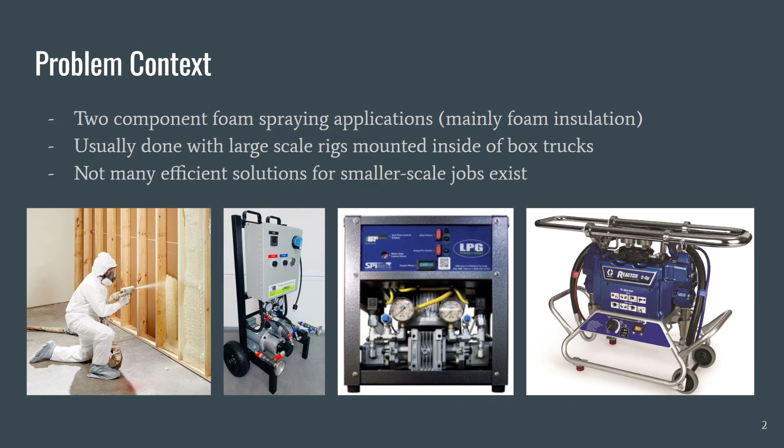So the scope of this project is to build a low pressure foam dispensing system that moves two material components from 5-gallon pails into the Nox hose assembly. There have been some prototypes in the past. We were tasked with improving upon these prototypes for ease of assembly, ease of maintenance, ease of use, and of course, cost and portability as well. And the other part of the scope is that it must be compatible with the Nox hose and gun that's already made.

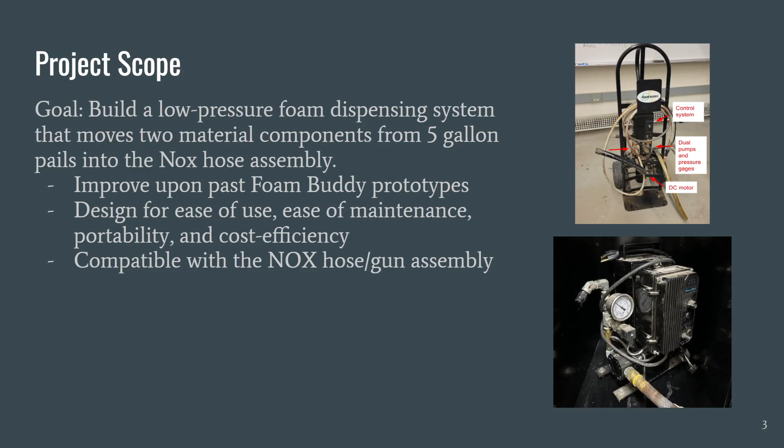Some of the key specifications are that the machine must have an adjustable output ratio, because most of the time we're looking for a 1-to-1 output. And there are many little different factors like temperature and pressure and things that may change those. So having a variable output is very important. We are aiming for a volumetric output of 0.25 to 0.65 gallons per minute per side.

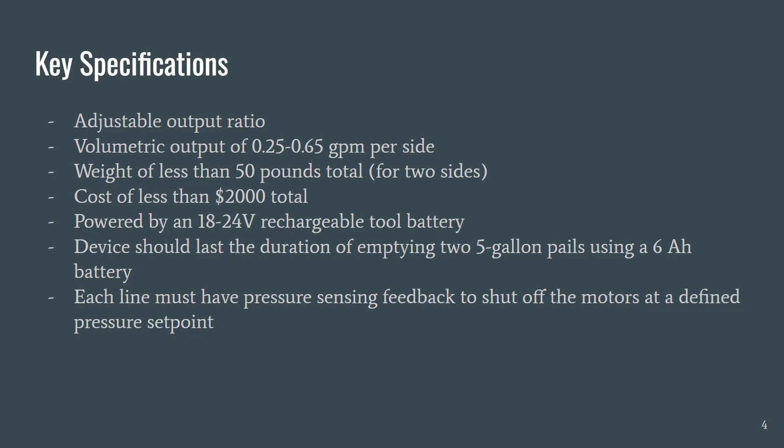We are looking for a weight of less than 50 pounds total, cost less than $2,000, and powered by 18 to 24 volt rechargeable tool battery. The device must last the duration of emptying two 5-gallon pails using that tool battery, and each line must have pressure sensing feedback to shut off the motors at a defined pressure set point.

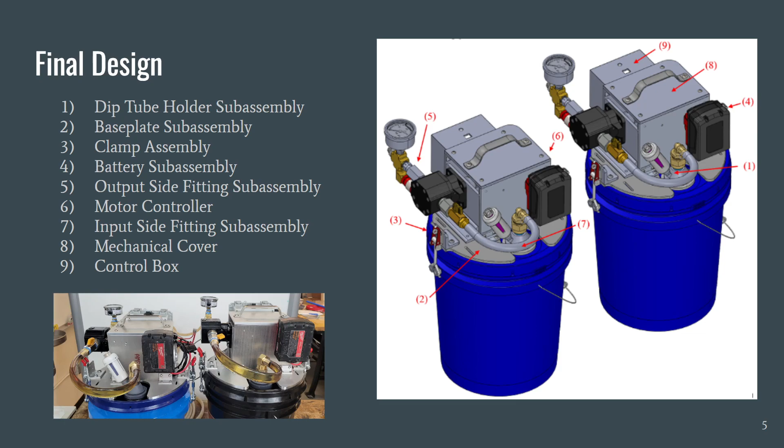So this is kind of the main portion of our design. It's the base plate sub-assembly. So the base plate sits on top of the bucket. It's just aluminum, and it houses the motor and the pump. So we chose our motor, which is a 24 volt DC motor, due to its availability, torque, and low cost.

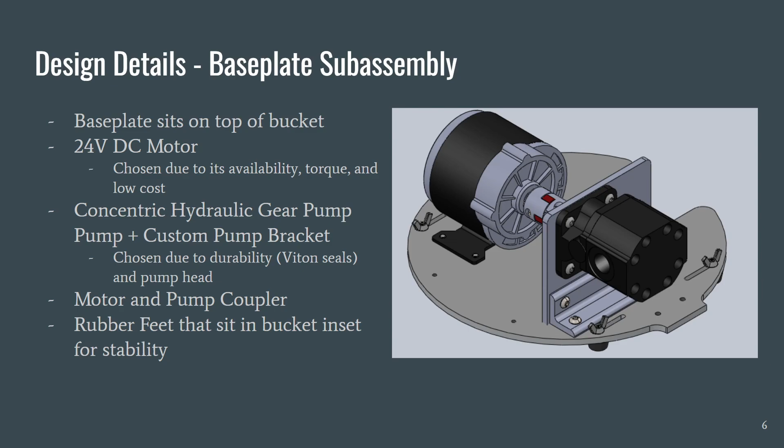And then we chose a concentric hydraulic gear pump, chosen due to its durability. It has Viton seals, which are compatible with the material, and the pump head that it provides. We also have a motor and pump coupler, and then rubber feet that sit in the bucket inset for stability. Our clamp subassembly is what actually holds the base plate to the bucket.

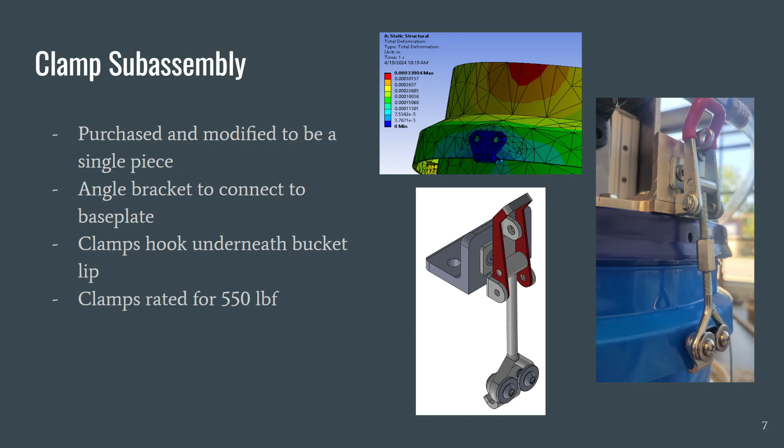So we purchased and modified these clamps to be a single piece. We have an angle bracket that connects it to the base plate, and the clamps hook underneath the bucket lip. This is our mechanical cover subassembly. It helps protect the user from moving components and provides a platform for the handle. And then it also houses the battery control box and motor controller for easy disassembly.

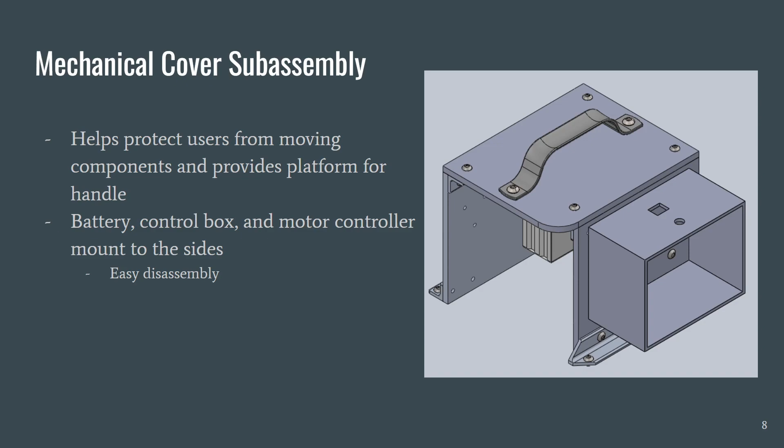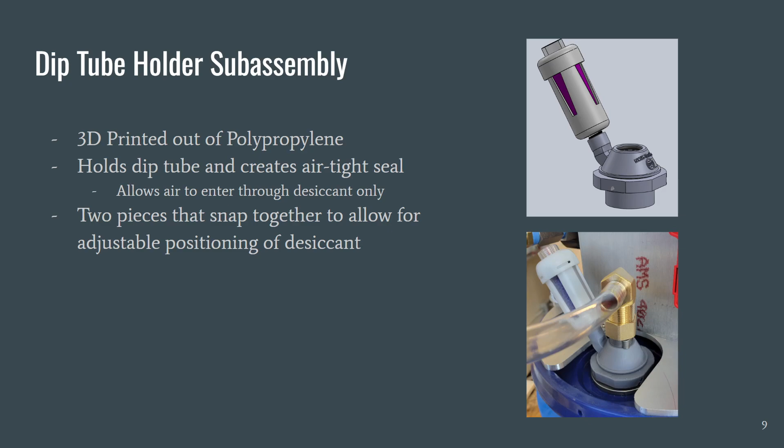This is our dip tube holder subassembly. So this attaches to the Rieke spout on the bucket. It's a 3D printed piece out of polypropylene, and it holds the dip tube in the center and creates an airtight seal so that only air can enter through the desiccant, which allows no moist air to get into the bucket.

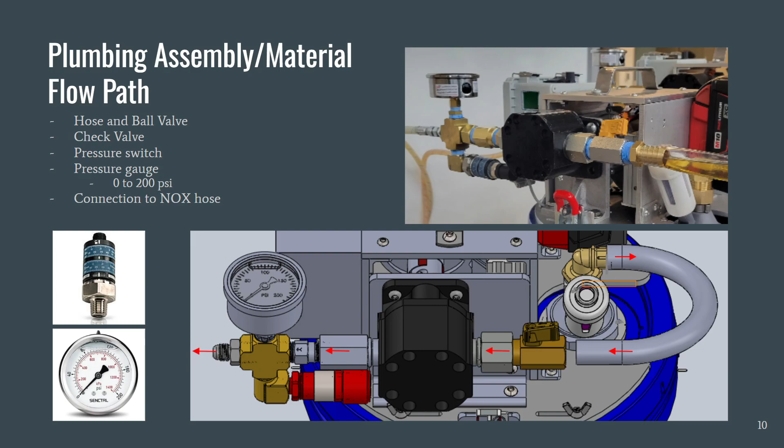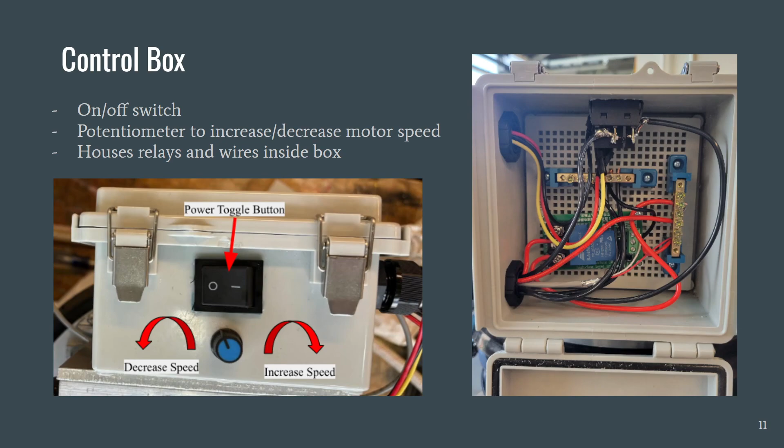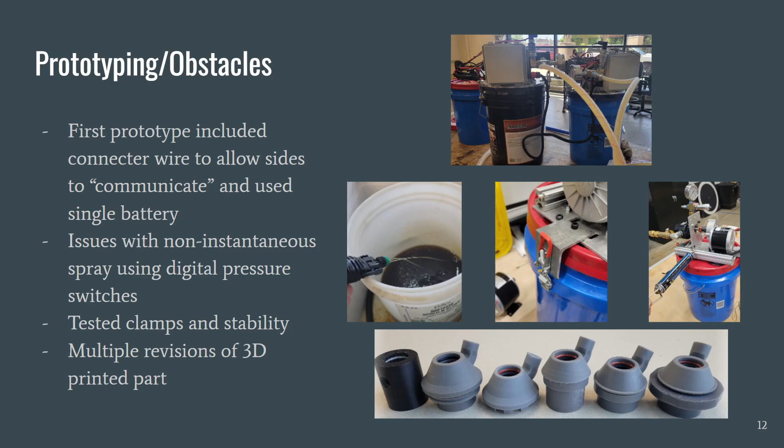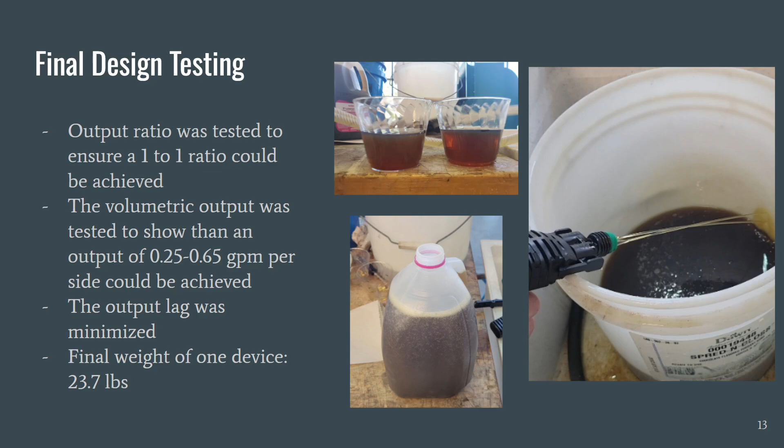And as explained before, we were having some issues with the lag in the nozzle spraying, and so we tested that again to ensure that the spraying was instantaneous as soon as you pulled the trigger, and that's shown in the right picture. And then we tested the weight of the device to ensure that it fits our specifications, and the final weight was shown to be 23.7 pounds. And now we will show a project demonstration video as well as a video of us spraying the device.

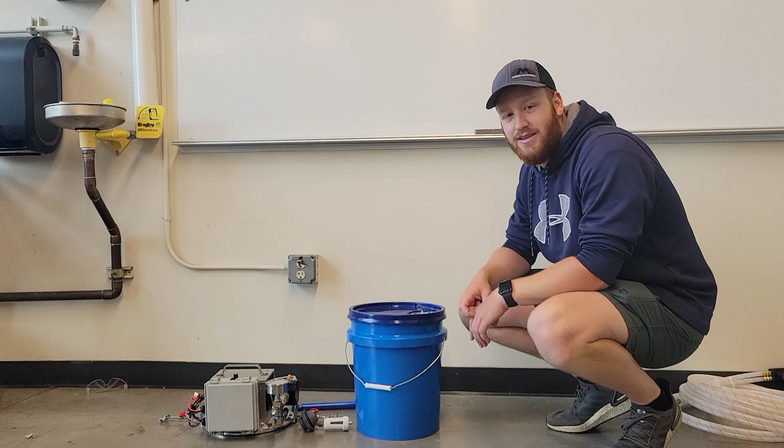Welcome to the Foam Buddy tutorial on how to set it up. You got your 5-gallon pail of material. If you're running 2 component systems, you'll have 2 of these, but it's the same procedure for both. Over here you got your actual Foam Buddy machine, all set to go with your dip tube over here and the hose that connects to it, along with the bucket connector and your desiccant.

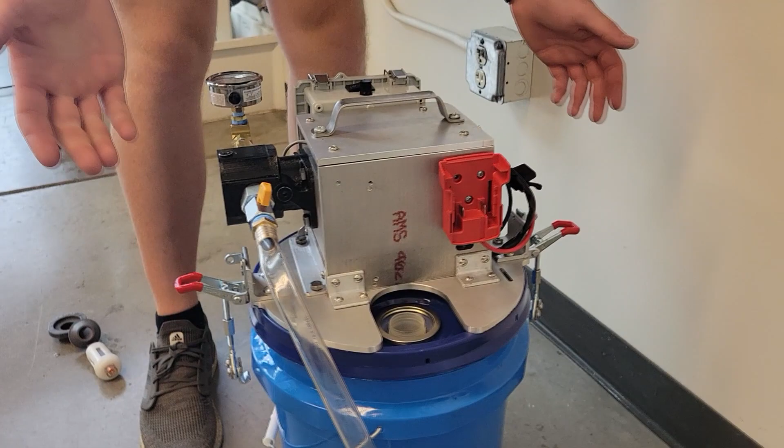So we will start by placing the Foam Buddy up on the bucket, making sure to pay attention that the spout on the bucket is in the center of the slot. From there, you'll come over to the clamps, and you can adjust them up and down just by spinning it, and you'll attach it onto the bucket and flip it up like that, and do the same for the other side as well. Then you'll take your bucket connector, twist it on to the spout on the lid.

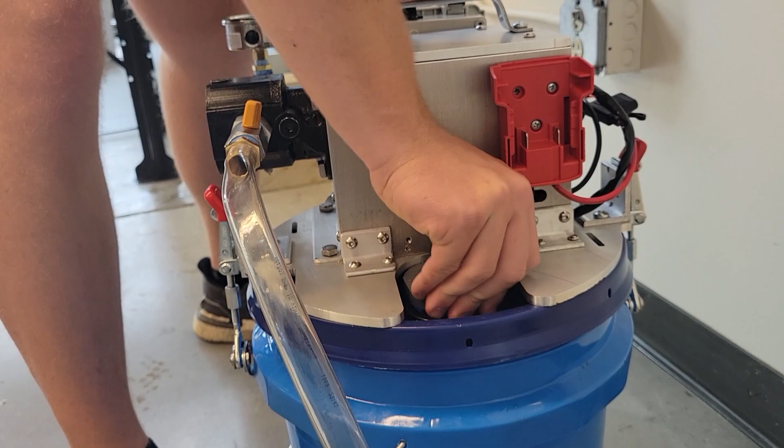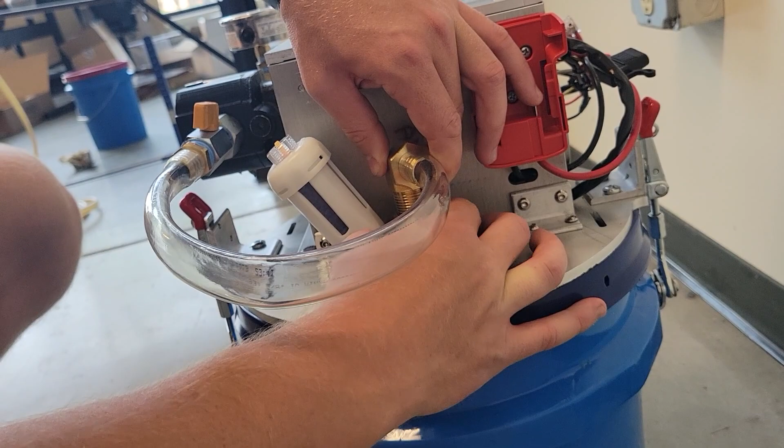And you take the top part with your desiccant and snap it in, just like that. And then you'll take your dip tube, slide it right down in, just like so. And then take your pickup tube, place it right on there, and tighten it down. From there, just make sure that your ball valve is open, place the battery inside the battery connector, flip the switch to on, and set your speed using the potentiometer.

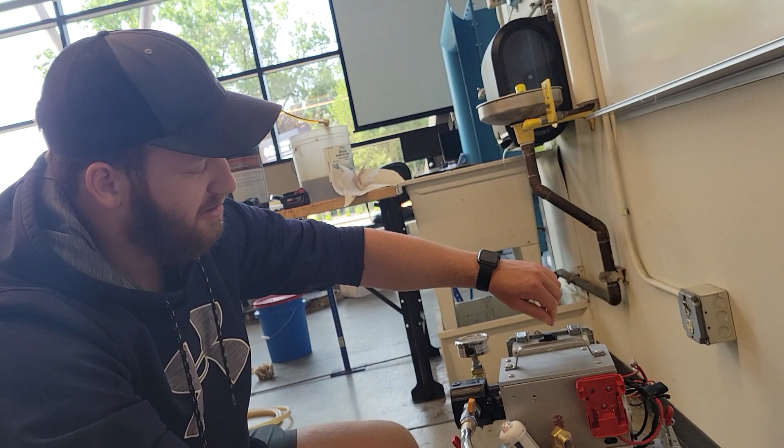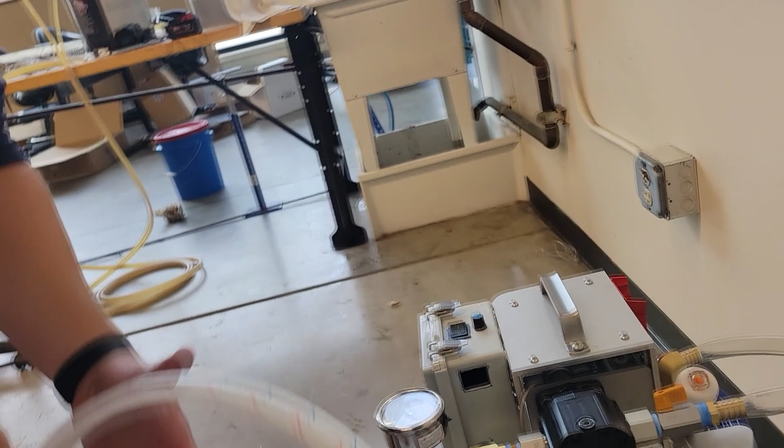Over here you have the hose side. This is where your hose will connect to. So you'll have a hose similar to this. One side will connect here. You'll have your B side component over here and connect the other side of the hose to that, and you'll be good to go.